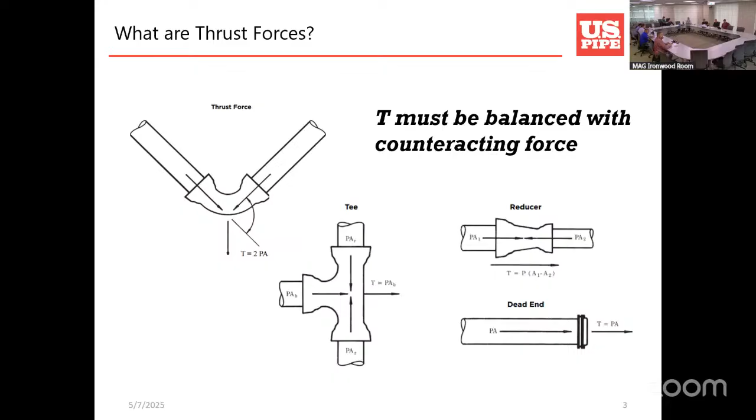The old way of doing this was with thrust blocks. You had bearing, gravity.

So in this example, it's a change in direction, so you had to have something there to prevent that pipe from pulling apart. The thing is, with the concrete thrust blocks, it takes time to pour that concrete and let it cure. It takes up a lot of valuable real estate, depending on the size and also the pressure of the line. Those thrust blocks can get very large. And since it's taking up a lot of valuable real estate, if there's ever construction around it in the future and it gets dislodged, you could have a leak and an issue.

So there is restrained joint pipe that means you don't have to use thrust blocks anymore if you are using those restrained joint pipes.

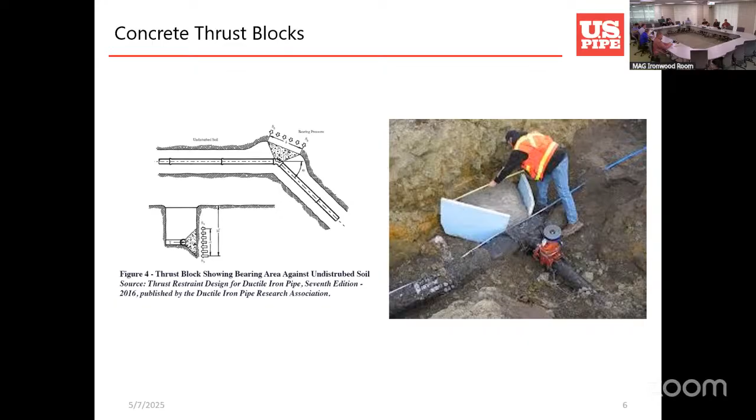So DIPRA, the Ductile Iron Pipe Research Association, has a calculator on their website - the restrained joint calculator. You plug in all your different parameters - size, diameter, laying condition, et cetera - and it's going to spit out an answer and let you know what your required restrained joint length is to counter those thrust forces.

And you'll notice too, it gives it to you in bare and poly-wrapped length, because poly-wrap, when you do poly-wrap the pipe, does require more restraint distance due to the frictional forces acting on that pipeline.

So the first type of restrained joint to mention is the Field Lok 350. This is one of our restrained joint gaskets. This replaces the traditional Tyton joint gasket and a Tyton joint bell. And you'll notice the teeth on those gaskets.

Simply put, you insert spigot into the bell and pull back. Those teeth bite down to the pipe, and it's now restrained. You'll notice it's limited in size - only available in 4 through 24 inches - but it is a very effective tool, and it allows you to just turn that regular push-on joint pipe into a restrained joint pipe.

So US Pipe actually introduced a factory restrained joint ductile iron pipe to the United States in 1979. We've been dealing with this for a few years, and you'll notice we've had a number of different restrained joints over the years, starting with the TR Flex, which was the one introduced in 1979. That went up through 36 inches, with varying deflection.

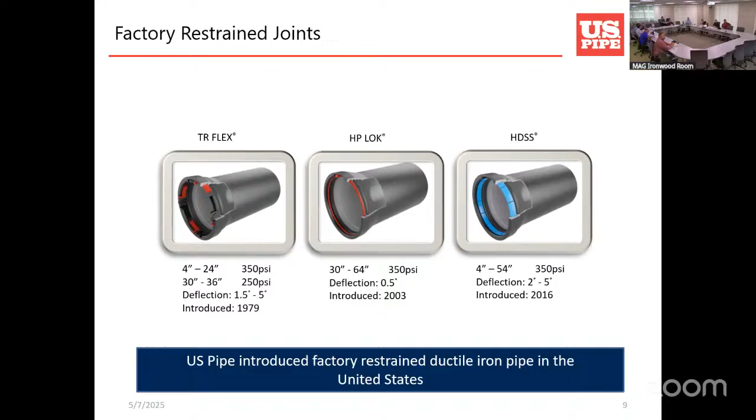So with restrained joint pipe, the way these actually function is you have a weld bead on the spigot end of the pipe, and then you have some sort of restraining mechanism internal to the bell. The more contact area that you can have on that weld bead, the higher the pressure rating can be, because you're distributing the forces around the circumference of the pipe.

And with the TR Flex, you notice the red is the contact area where the actual restraining mechanism is - there's a bunch of open slots there. The thing with the TR Flex is in the larger diameter, 30 and 36 inches in particular, under high pressure situations, since it doesn't have a contact area all the way around the circumference of the pipe, it creates these point loads, which is why we actually had to derate it by 100 PSI in 30 and 36 inches. What I mean by that is a class 350, normally rated at 350 PSI, was only rated at 250 PSI. So you had to use that class 350 pipe to get that 250 PSI rating - sort of a limitation there.

And then with the HP LOK, you almost have a full 360 degrees of contact area on that weld bead, which is why it had a higher pressure rating.

But with it being one solid ring, that's why it only had a half a degree deflection, which is why we introduced the HDSS, which almost has a full 360 degrees of contact area on that weld bead, but it uses individual locking segments, which is where you get a higher deflection capability from.

So again, the TR Flex had a left hand and a right hand locking segment. They were red and black. 4 to 24 inches was rated at 350, 30 and 36. We derated like we just talked about.

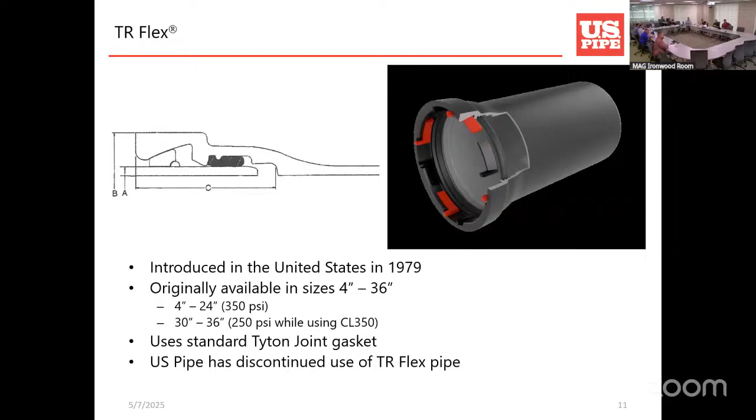Simply put, spigot into bell, you can see the weld bead on the spigot end, then those locking segments get inserted. So as those thrust forces are applied and trying to rip that pipe apart, that locking segments are making contact with that weld bead, and that's what's preventing the pipe from pulling apart.

And what's good about restrained joint pipe is it can go together very quickly. Small diameter, 20 seconds or less, larger diameter is a couple of minutes. So it's a very quick way as well.

And then the HP LOK, we introduced this back in 2003, 30 to 64 inches. Now we only have it available in 60 and 64 inches.

The pipe comes with the ring already in the bell, so you would insert the spigot into the bell, tighten down that nut and bolt system, which would tighten down the ring in front of that weld bead. And then when your thrust forces were applied, the ring would make contact with the weld bead again, preventing the pipe from pulling apart.

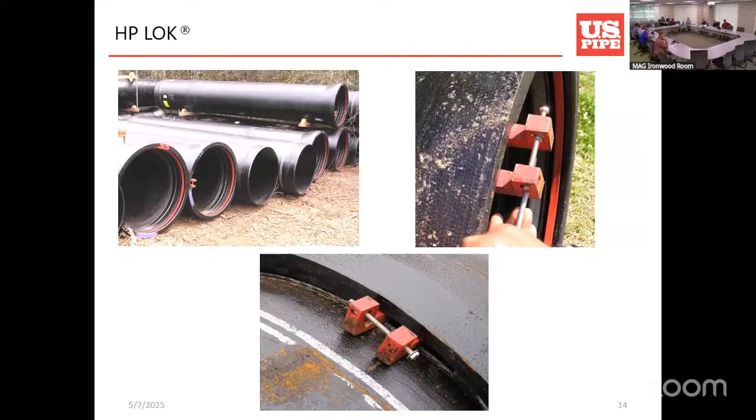And then we introduced HDSS back in 2016, 4 to 54 inches. Again, you can see almost a full 360 degrees of contact area on that weld bead with those individual locking segments, which are what you see in blue on the screen.

And what's good about HDSS as well, though, is its restraint joint working pressure rating is true to its size. So a class 350 is rated at 350 PSI, class 250 is rated at 250 PSI. So this is the industry leading restraint joint with deflection and pressure rating as well.

And you can see underneath the bell there in that picture, you can actually see those locking segments as well. So it's kind of a check for the contractor. They can see all the locking segments underneath the bell.

And what's good about these two is these locking segments are inserted through that 12 o'clock position and then slid to the left and slid to the right. So it's all gravity fed. So if they're not going together for whatever reason or not dropping in place, it's kind of a check on learning, hey, something's not right here, which allows that contractor to go back and fix the problem. Maybe they're over deflected, not homed all the way, whatever it may be.

And then by only inserting the locking segments through the 12 o'clock position too, there's safety in mind there. So the contractor's not reaching down underneath the pipe to like the 7 and 5 o'clock position. They're only inserting those locking segments through the 12 o'clock position.

And what's good about it too is you can see all the deflection capabilities, and you can see why we have that. 30 inches is a really good example. 2.5 degrees deflection while rated at 350 PSI, as compared to that HP LOK, which was only a half a degree of deflection while rated at 350, as compared to the TR Flex, which is 1 3/4 degrees deflection, but only rated at 250 PSI.

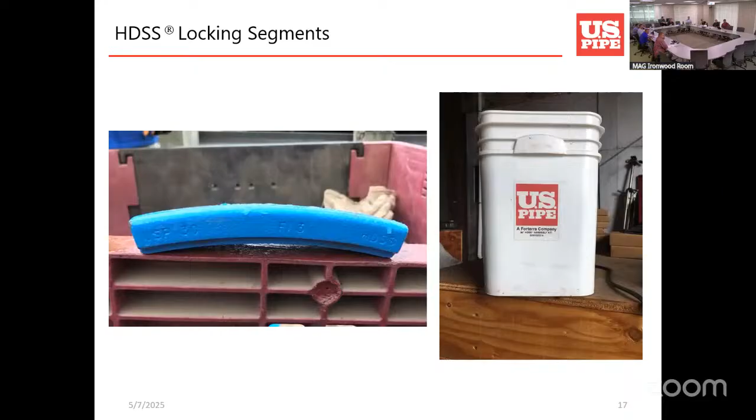And then you can kind of see it in the upper left-hand corner photo, but there's little notches on the back side of the locking segments. And that also allows the contractor to disassemble this for whatever reason. Maybe they install an extra joint, didn't need it to be there. They can disassemble this as well.

Next slide. And then we had to go through a whole testing process. We can't just claim that we meet AWWA. We have to go through a third-party test, regular testing, and then third-party testing. So this was actually a 48-inch HDSS Class 350 test that we did back in 2020. And it actually tested to 969 PSI to failure, which meets and exceeds the standard. And that equates to about 1.8 million pounds of thrust force.

And there is a video there if you want to play that.

To put that in context, about 1.8 million pounds of thrust force - we're talking that's like the amount of thrust force that takes rockets into space. So that's a substantial amount of force right there.

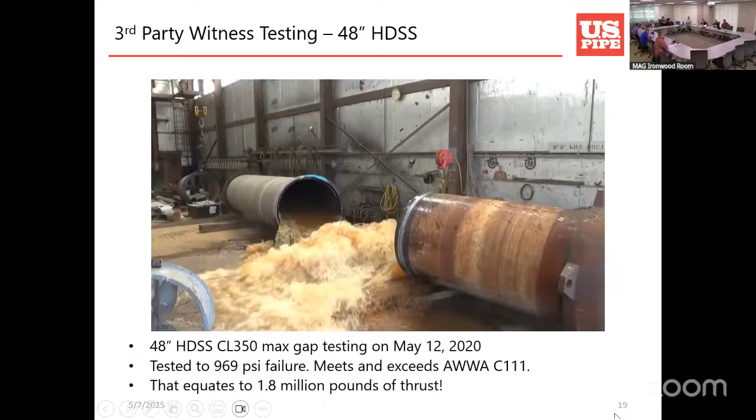And then lastly, just corrosion control. There's numerous methods to protect ductile iron pipe in regards to corrosion. The first and one of the most popular is polyethylene encasement, also known as polywrap. It's economical, it's effective. Essentially what it's doing is minimizing the flux of water making contact with the pipe surface. And what water does, water brings oxygen. So oxygen is a component that could cause corrosion. So if you eliminate that, you help eliminate the corrosion potential.

There is an improved version through DIPRA. All the member companies utilize VBio - so us, McWane and American all utilize this, but it's an improved, enhanced polyethylene encasement. So it still protects against normal galvanic corrosion, but it also has a biocide in it that helps protect against any sort of microbiologically influenced corrosion. But then it also has a corrosion inhibitor on the inside surface. So when you polywrap pipe, you're trapping in oxygen. An initial corrosion rate could occur, but the corrosion inhibitor prevents that from occurring.

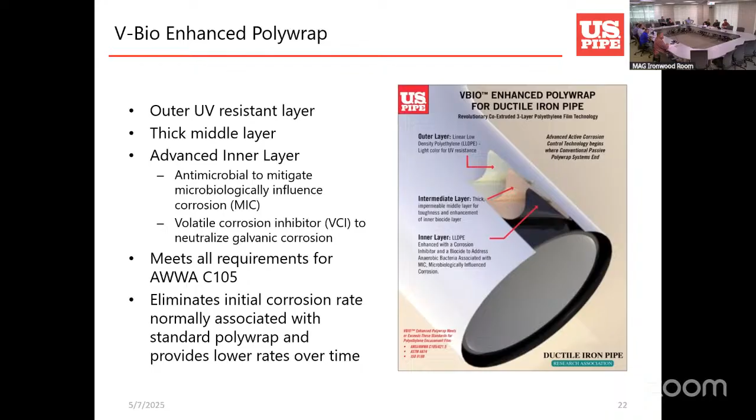And it's white like that. You'll wonder, why is it white like that? White polywrap on black pipe helps identify cuts or tears. So during the construction process, if anything gets torn, you could actually see it and then replace it. Whereas if it's black polywrap on black pipe, it's a little harder to identify that.

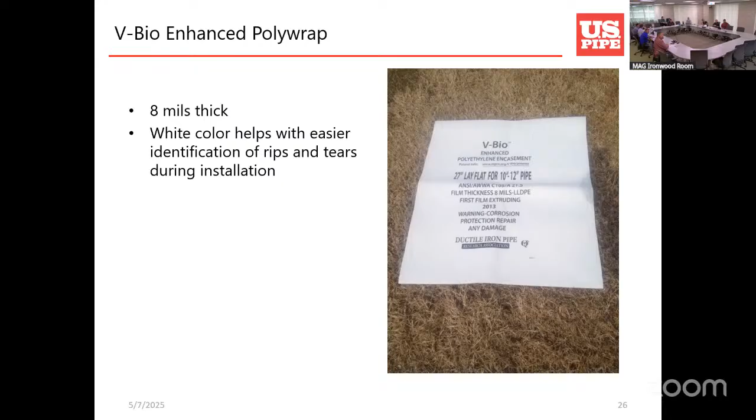And then metallic zinc. So what zinc is, it's essentially acting as a massive anode, a sacrificial cathodic protection system. It's applied through a thermal sprayer. It's 99.9% pure zinc, and it's applied per ISO 8179 at 200 grams per square meter. So it's applied in weight, not necessarily in mil thickness, but it's roughly about 1 to 2 mils thick.

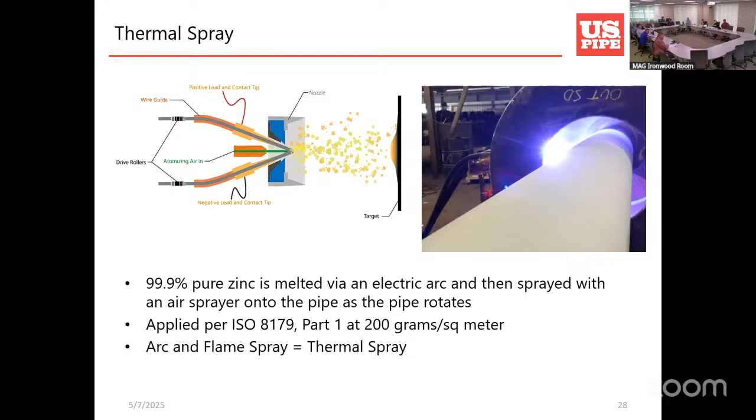And you might wonder, when do I need zinc? When should I use polywrap? So DIPRA, along with Corrpro years ago, put together this design decision model, DDM. There's a likelihood and consequence - based on the soil studies, based on the pH, the chlorides, the redox, all that in the soil, and then also the consequence, what's the size, is there an alternate pipeline. It's a point-based system to actually help you determine when you actually need these corrosion protection methods for your pipeline. So that way you're not just arbitrarily saying we need to always use zinc, but it's giving you actual scientific reasoning when you do need it. And that's just the chart.

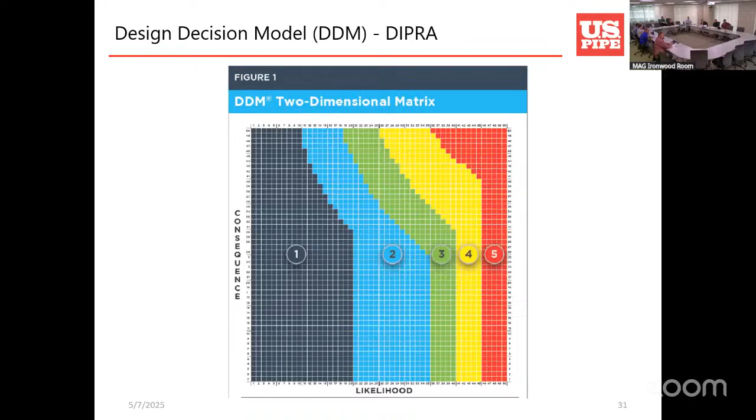You'll plot your points, and it will tell you 1 through 5, 5 being the worst, 1 being a really good environment, but it will tell you when you actually need to use what. So 1 would be as-manufactured with shop coat, and 5 is a really bad environment where we're recommending the zinc and the V-Bio used together.

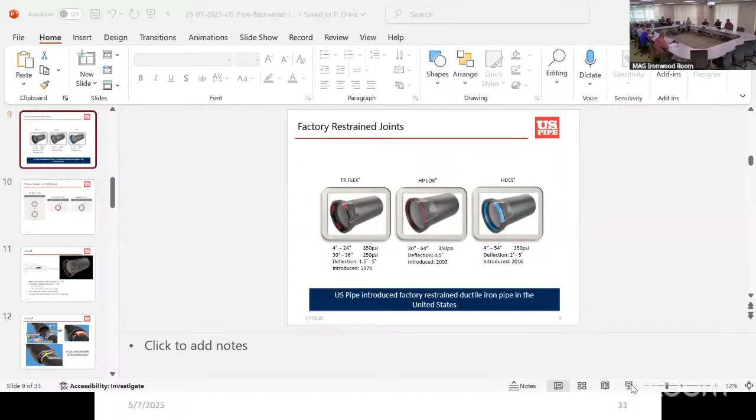Yeah, HDSS, that's it. The other thing is DIPRA—Jeffrey Butters is also available to come out if you guys need something on corrosion protection and don't want to bring a specific manufacturer on board. DIPRA, the Ductile Iron Pipe Research Association, kind of oversees that. You're more than welcome to invite him too.

Is there a quick link to that restrained joint calculator, Gene? There is, on DIPRA's website. Go ahead, Jeffrey. Yeah, if you go to dipra.org and look up technical references, there'll be a link for the calculators—we have a list of calculators there you can use. Okay, yeah, I think I've seen it before. Gordon, could you put up that contact sheet, that last slide, one more time please?

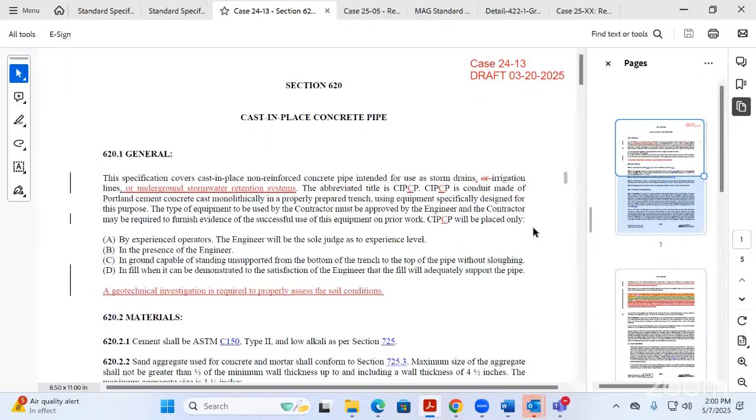So that still needs to be done, but I feel like from what I've heard, we were open to the potential of maybe pushing this to an action item to vote on approving the premise of the case that we started with. This one does clean up the nomenclature for cast in place concrete pipe and does take out some of the archaic language for what to do with expansive soil conditions that is not with that strikeout right there.

So as we know, we then got into getting input from the Bluecor's geotech team, and we added this new paragraph. So I still feel like the broader case, if we were to produce another case that would look at the ADOT and ACI specs, there's more work to be done there based on Brian's input. But I'm open to get this off the list for now, to propose moving this to an action item and then continue the effort to look at a broader case to do an overhaul on this.

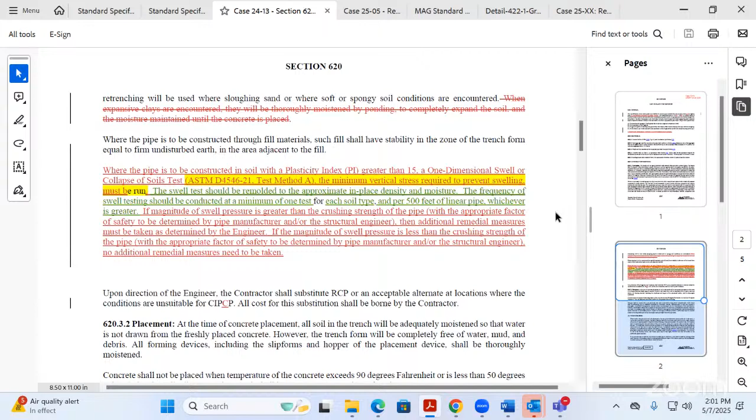So Warren, refresh my memory, but I recall this being up for action at one point, potential action, and then we had some feedback and it looked like it was going to grow into something larger. We pulled it off the agenda for action. But what I'm hearing is that we're not going to be growing it into that bigger item. Is that what I'm hearing?

Yeah, there is still room for that. And as we know, if we were to have some time to regroup with Bluecor and Brian, we could still kick this for another month just to see if we could pull this together to do the broader case. But we're still left with those two options. If we wanted to put it on action for next month with option one as is, and if we are able to gather steam to draft the overall case, then we could go in that direction too. So that's pretty much where we're at.

Okay, well getting some time to roll our sleeves up and get everyone together is the key item there. I think at this point, we need to encourage all the committee members to go through this and see where they stand on it. We'll put it up for possible action for the next meeting. Is that what I'm hearing, Warren? Your preference? Yes. Okay.

In the meantime, I will make sure that we get out there on the case page, the ADOT spec and the ACI spec, so we can all see that together.

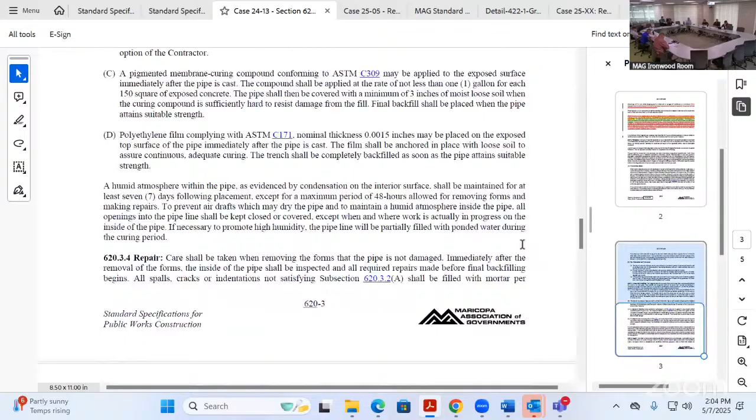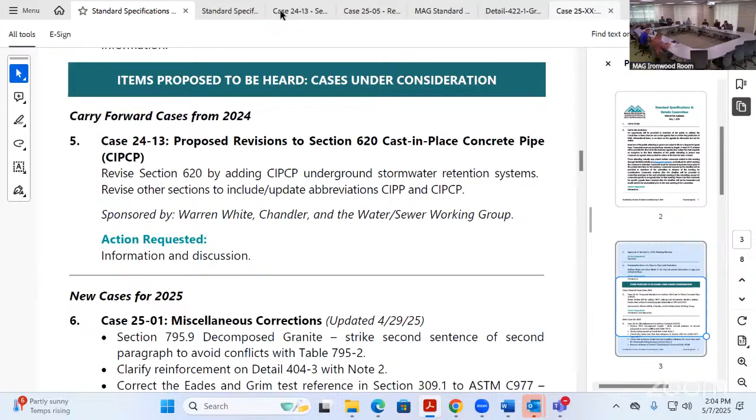We'll move into agenda item number 6, new cases for 2025. This is miscellaneous corrections. We have one that was added for section 752, which was deleted out of MAG. I'm not sure when it was deleted, but it doesn't exist, so we need to get that scratched out. It'll be 610.10 B as in boy for joints, and it'll just reference section 750.

All right, any questions from the committee members on miscellaneous corrections or any of them on there?

Just one comment, Mr. Chairman. I haven't read it in a while. 610 is just the general water line spec, right? Is the 752 section the old ACP pipe? That I don't know. 752, does anybody? That is correct.

So in this joint section, should we also make reference to the PVC water line spec then? Because that might have different joints, not just that. 750 is ductile pipe, so if we replace 752, maybe we need to insert the PVC spec as well.

Yeah, let me look at that. That's a good point. Thank you.

I don't know if we have a PVC pipe material pipe section in 700 though. Jim Badowich, Avondale - that's one thing I discussed, I think, at the last meeting. We need to add that. We've got all these other materials in there and somehow PVC got left out. Wait, Jim, am I hearing that there is a section and we need to add it to the 610 reference, or we need to create a section for PVC? I think we need to create a 700 section for PVC.

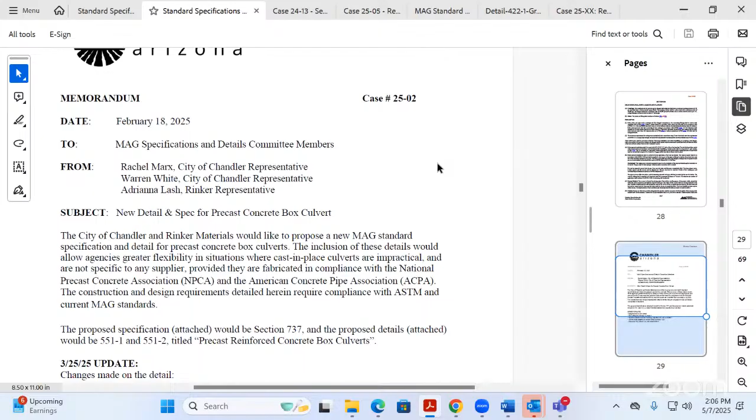Thanks again, Mr. Chair. I don't believe Adrianna was able to make it today, but we received comments from City of Phoenix. Thanks, Jose. Through that process, updates were done to the spec. There's the comments from City of Phoenix.

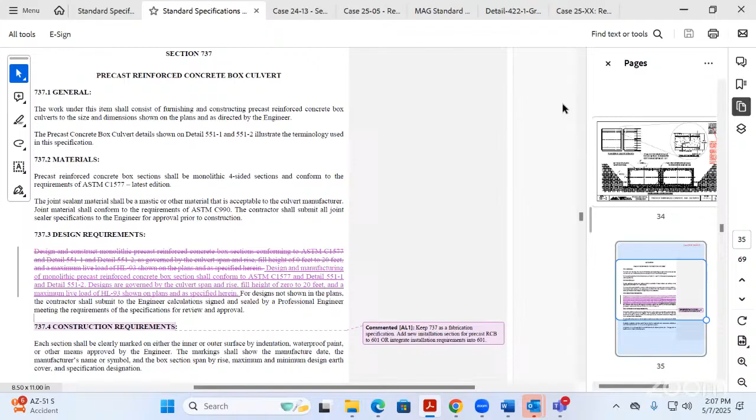One remaining discussion item, and I feel like we have good direction, is obviously this is meant to be a material spec, and whether to keep this as a fabrication spec or a material spec, or integrate installation into this. The thought is to probably keep it as material, and then move some of the installation aspects to 601, and that's still on the list to do. We did want to work through the working group a little more this month to talk through some of those things.

So Warren, I know Ryan Nichols had a lot of questions or comments at the last meeting. Can't recall all of them, but did we address some of those or at least take them into consideration? I will have to go back and look through those to see if we've touched on all of Ryan's comments, but if not, we'll bullet those out and add that to the discussion.

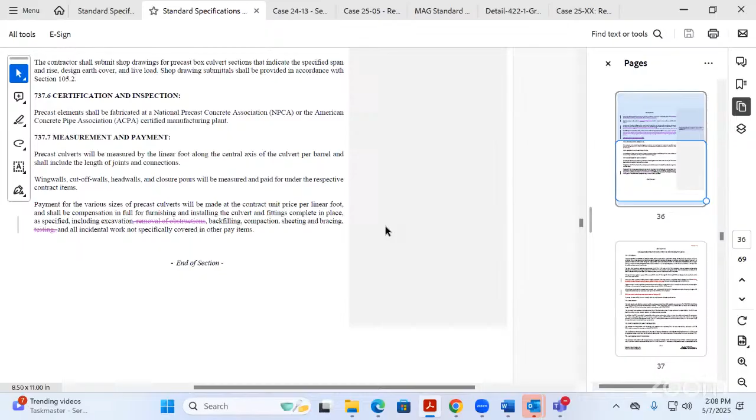Still need to get a meeting set up with Adrianna to go through this when I have some more time as well. Yeah, I looked through the meeting minutes. I did see him in there, unless Ryan wants to touch on them again.

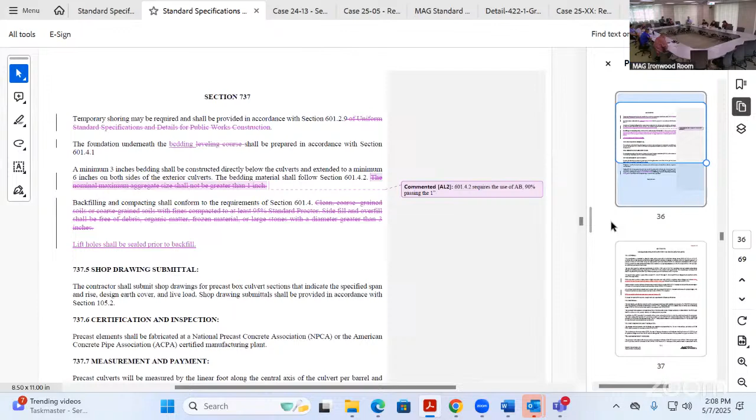No, okay. There was a removal by others. We're supposed to remove that language out of the detail. Is that the same detail, right? Yeah, yeah. Changes have been made to the detail at this point.

All right, anything else on this case, Warren? Not at this point. Yeah, Ryan, we'll make sure we revisit your comments and get this updated for the next meeting. All right, open it up to the committee for discussion. Any other questions or comments from committee members?

All right, agenda item number 8 is case 25-03. This is section 751, cross-link polyethylene pipe for water service lines, also known as PEX A. This one also has brought Warren White from Chandler. Warren's been a busy man.

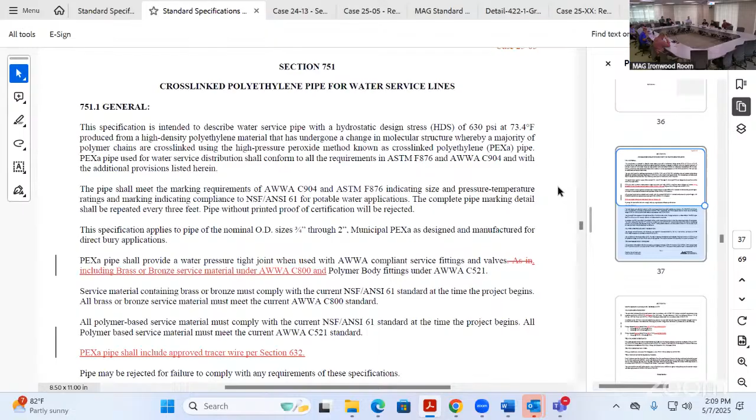I know we were talking about identifying at the last meeting, identifying the municipal PEX A with certain markers. And then obviously there's a lot of discussion about pipe colors and including markings. But Warren, you want to go ahead and give us an update?

Thanks again, Gene. At this point, we incorporated some of the feedback that we received in the committee meeting and then also in the working group, plus identifying through Jeremy's identified another change there in that first red section where in addition to the brass and bronze service for the AWWA requirements.

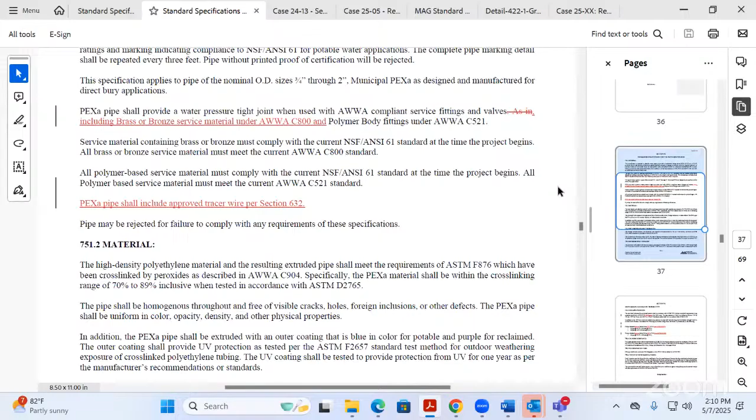And then the one aspect that came out in the working group, I believe it was Jim's comment, although not exactly fitting here on the material spec, but the thought was from the working group, it would be helpful to ensure that the tracer wire is at least included here. It is part of the new section 632 for all service lines. But we've drafted it in here just to, at this point, for feedback.

Very good. Yeah, that's crucial component being non-metallic. We need to be able to trace that.

And then onward from there, there was some comments in the last group. So we just cleaned this up a little bit to be more clear that the bulleted standard design factors are coming from that ASTM D2387. And then just kind of changing the language there to better match the ASTM. Just some general cleanup at this point. Looking for more feedback.

Thank you, Warren. I know I mentioned it a dozen times, but Glendale gave it a shot. We use it on the back side of the backflow preventer, and it worked out really well. We put it in a sleeve and gave it a shot.

All right, I'm going to open it up to the committee members for discussion. Any questions, comments on this case?

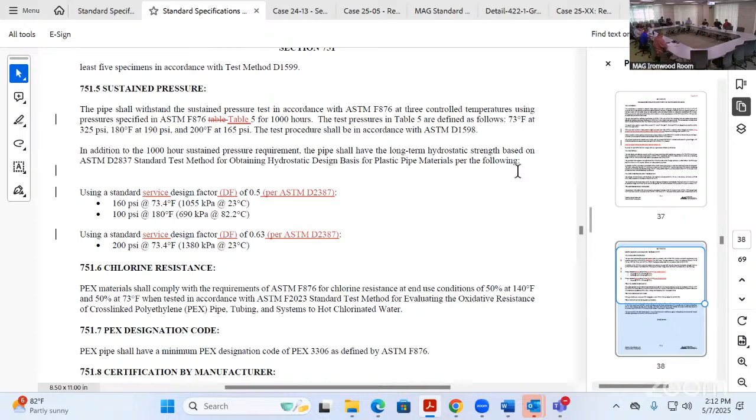Warren, any idea? What are you thinking for putting it up for action? Put it out to Jim, and Jim, do you think what, another meeting, working group, finalize and then call it maybe for July, maybe? Mr. Badowich? I think that's fair, Warren. Okay.

There's no rush. It's not a large section. It's relatively small. Our committee members can get through it in a matter of minutes. So I encourage all committee members to review it and give input back to Warren or the working group committee. And we'll discuss it at the next working group meeting and then put it up for action. Maybe we'll discuss the details of it at the next standard specification and detail committee meeting.

All right, any other questions regarding the PEX?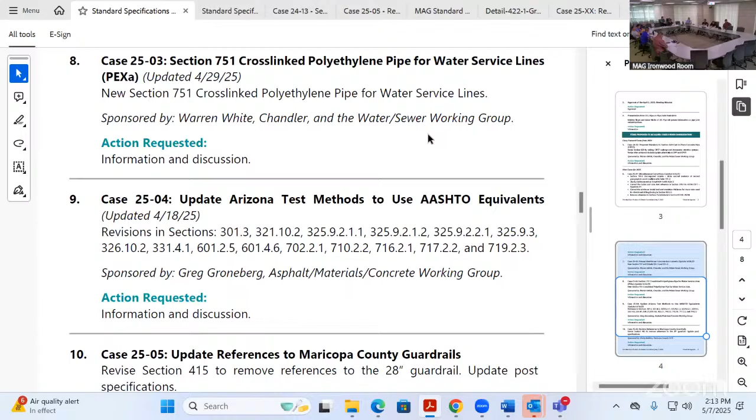Moving into agenda item number 9, this is case 2025-04, updating Arizona test methods using the AASHTO equivalent version. Greg is obviously not here in the flesh. We feel him, we feel his presence. Rob is going to speak on Greg's behalf. If you want to give us an update, please.

So we've gone through the working group and kind of identified every area within MAG that they reference the Arizona standard test methods. ADOT has decided to eliminate or change up their ATTI program to move towards all AASHTO procedures, which is great for MAG because you guys are pretty much all AASHTO procedures, but there is some sampling and different test methods that are referenced that we're gearing towards the ATTI certification. That way, when technicians get certified, they're actually being certified for what they're doing within MAG instead of MAG having old ADOT methods. So it's just updating this.

Their field certification changed in March to AASHTO. Their laboratory is changing in July, and their asphalt is being updated in September. So we'd like to get this approved this year. That way, starting in 2026, it's in line with ADOT and the ATTI methods.

I think ARPA did a representative of ARPA, Arizona Rock Products Association. You guys did a great job getting in front of this.

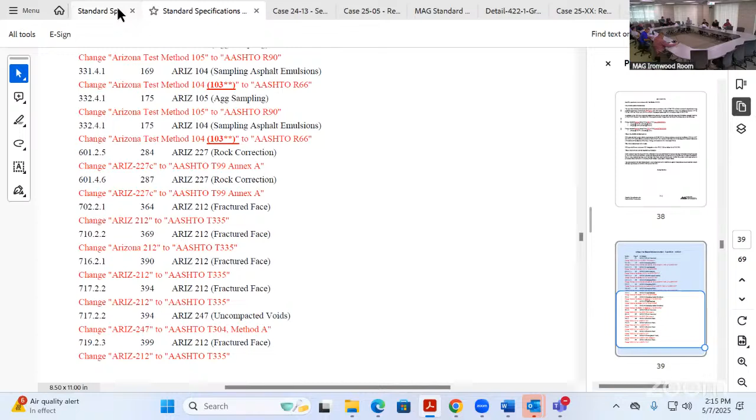All right. We'll move into case 25-05, agenda item number 10. This is updating references, Maricopa County guardrails.

Marty, I don't believe Marty's on, is he? I'm here, this is Marty. Nice, you want to give an update on this, please? I apologize, I was late, I was just keying away and totally forgot, but I came on about 2 o'clock, so I'm here.

You have an update you want to provide, Marty? I do not have any updates. I did take a look at ADOT, did go over to take a look, that was suggested. We don't have any comments regarding what ADOT has, and we just wanted to make minor changes with respect to the 2800 series, just to remove those details because we are removing them from our standards in 2026. And we'll be using them only for maintenance purposes. So if there's any questions on?

When would you like to see this case go, Marty? This year, anytime you feel comfortable with moving it forward. So we'd like to see it implemented for 2026. But anytime, if there's no questions or comments, move forward anytime you would like.

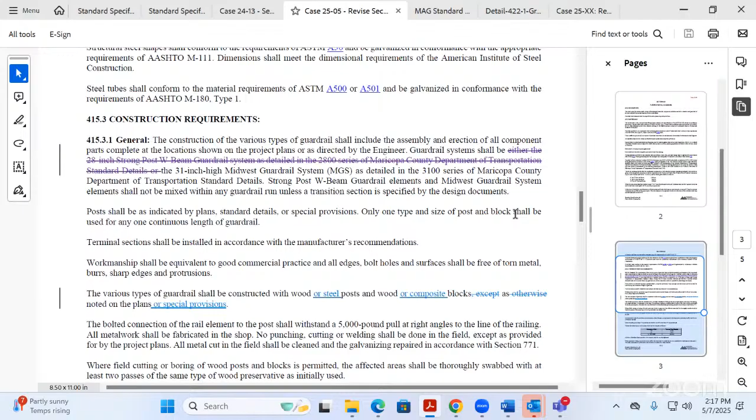All right, well I'd suggest everybody get it to their transportation division and see if there's any comments from their end that maybe we didn't address. Definitely contact me, or at the meeting here, or you can contact me if you have any questions. I don't know if any jurisdictions are still using those details, so if there's any jurisdiction still using those details that are references from ours, definitely reach out to me so I can have a discussion. Yeah, thank you, Marty. All right, any other committee members have questions or comments on this case?

Marty, this is Brian Gallimore. Is any of the detail changing or just the specification itself? No, the details are being removed. So from the standard, the MAG standard details that we have for the 2800 series, all those details are being physically removed from our supplement, and we're going to go with the 3100 series for MASH. So we just wanted this to reference that, and we will make modifications to our specification for guardrail in our supplement as well.

Okay, thank you, Marty. Okay. Thank you, Brian. Marty, thank you for the case and the update. Any other comments from committee members on the case?

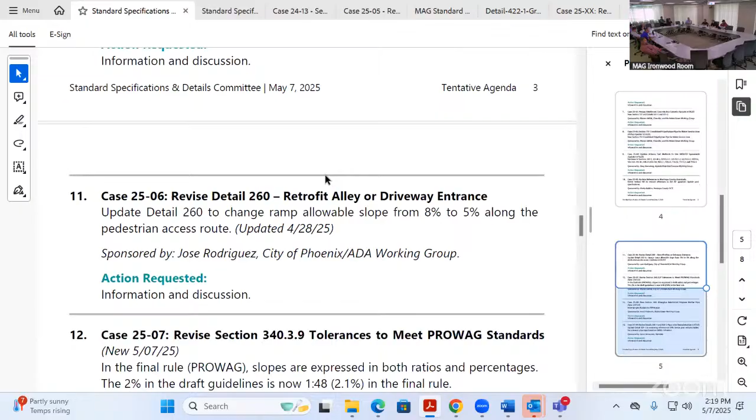All right, hearing none, we'll move into agenda item number 11, case 25-06, revised detail 260. This is a retrofit alley or driveway entrance. Jose Rodriguez from City of Phoenix, you want to provide an update?

Yes, thank you, Mr. Chairman. So we discussed this a little bit more at the ADA working group. There's a couple of comments that came out from that discussion. There's a suggestion from the City of Tempe - I know Gordon's trying to work on putting it up there - changing a little bit of the language on the call-out for the sidewalk width. They just want to make sure that they emphasize that the sidewalk width needs to be agreed upon by the agency, not necessarily as shown on the plans, because they have some non-standard cross sections where they have really wide sidewalks. So that's that box on the top of the red notes.

Couldn't you just leave it as minimum 8 or minimum 5? No, they want to make sure that they specify that the overall width needs to be approved by the agency, because they get some plans that fall through the cracks and call out a sidewalk width that doesn't meet their standards. It's a review, we'll deal with it.

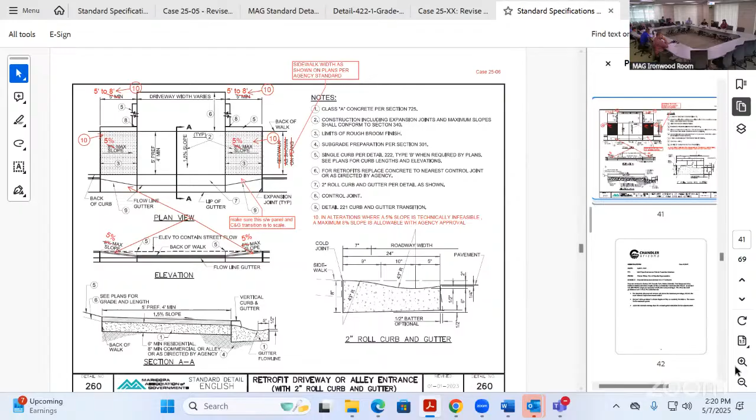Plan review, right? And outside of that, there was a general comment to make sure that when we rework this detail, the dimensions or the drawing are somewhat to scale. So we'll take a look at that when we revise it. I haven't heard any other comments on it. I'll bring in a clean copy at the next meeting, and then probably looking forward to a potential vote in July.

How's the working group doing? You getting good feedback from the members? Yep, there's a lot of work to be done, so we're getting a lot of attendance. That's for sure. Well, attendance is one thing, but is it like a typical project where two guys do all the work and everybody gets the same grade? I think we're cracking the shell of some of the participants.

Can you remind me, the change from 8% slope to 5% slope was because these are not interpreted to be curb ramps, and so it doesn't meet the standard?

Is that why the change? Correct, yes. Because we checked with the access board, and technically because the pedestrian is still walking through what is considered the sidewalk, they need to maintain that maximum slope, as opposed to leaving the curb. So it's not a curb ramp, it's not a curb. Okay, thank you.

Therefore, it would not require truncated domes because you're not leaving the sidewalk? Yes, but just to clarify, there are other conditions where you would need truncated domes under PROWAG, and that really comes down to whether or not that driveway has a yield sign, a stop sign, or a traffic signal.

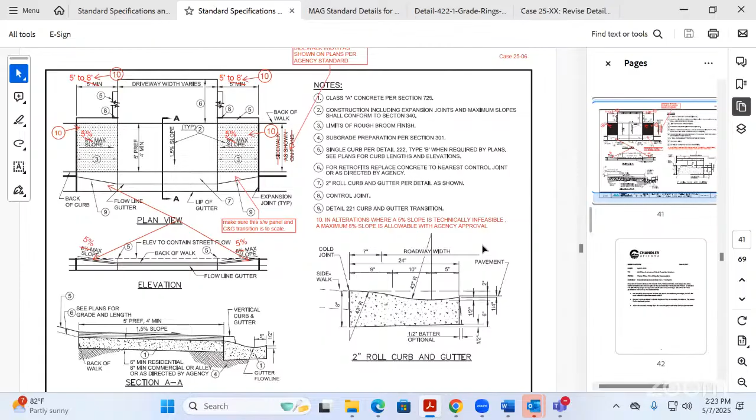And that goes on that note 10 too, Jose, right? Yes. All right, thank you, Jose, for that update. Do you have any other items you need to update? I'll open it up to the committee members for additional discussion. Any questions or comments on the case?

All right, I encourage everybody to look at the markups. Jose, are you going to start putting this into a clean version then? That's what I heard. Yeah, I think Warren and I had discussed in the working group that we were going to look for a volunteer from our consultant partners to help out with some of the drafting effort. If not, I'll get somebody in the city, but I think I did find somebody, I just need to reach out to them.

Right, thank you. All right, agenda item number 12, which would be case 25-07. This is revised section 340.3.9, tolerances to meet the PROWAG standard, another ADA item, with Warren from Chandler sponsoring this. Warren, since this is a new case, you want to provide some context to it?

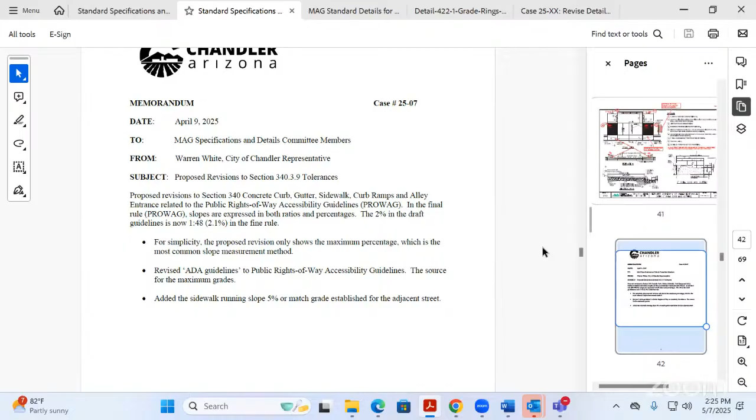Sure, thanks, Dean. Yeah, this would be our second case coming out of the working group, more or less the low-hanging fruit item, just to modify the tolerance section in section 340 to better match the slight changes that came in PROWAG, mainly for the slope allowance, which is now from 2% to 2.1, and then revisiting that paragraph slightly just to clarify.

And then there are some times where that may not fit everything, so that first sentence we've added, except as expressly allowed for certain conditions, this statement the grades shall not exceed the maximum grades indicated, and then removing the older term ADA guidelines for specifically where this is coming from, which is the PROWAG.

So this is where we're at in terms of the working group's discussion and this paragraph, open to any feedback on that. Yeah, I'll open it up for discussion.

Ryan? Yeah, Warren, I'm noting that the tolerances, the percentages are sometimes listed as a whole number, no decimal, and sometimes with a single decimal. And I guess the question becomes, what's the tolerance to the tolerance, right? Right, so and I'm going off memory here, but a 1 in 48 slope is 2.08 something percent, and it looks like it's been rounded up to 2.1.

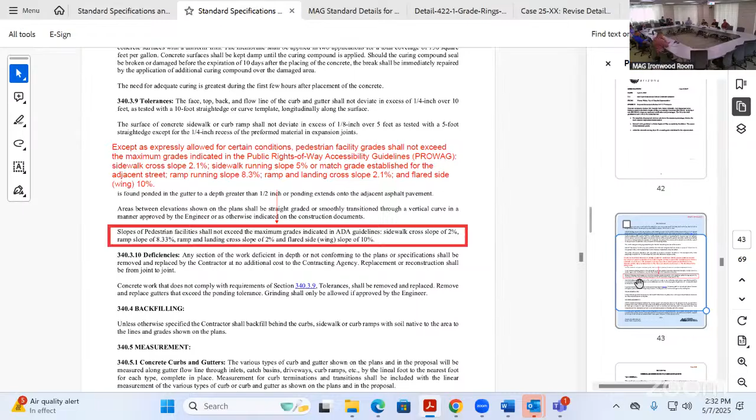This is case 25-08, a new section 746 for fiberglass reinforced polymer mortar pipe. This one is brought by Arvid. Arvid's not here today, so I can give a quick 30,000 foot summary. If anybody else has been intimately involved, feel free to jump in. Basically, it's for gravity feed sewer, sewer force main, storm drain irrigation, water transmission, and other conveyance systems with an operating pressure up to 350. It's good for 12-inch through 126-inch pipe, direct bury, slip lining, casing carrier, tunnel carrier, direct jacking, micro tunneling, and above ground.

So I encourage all the committee members to look at this new section. It was just put out.

Any other committee members been involved in this with Arvid?

Good afternoon, everybody. This is Rene Garcia. I've been intimately involved with it, I wrote it. I'm with Hobas Pipe, Senior Director of Engineering, been there for 25 years. We were asked to write a material spec for fiberglass pipe that was generic for this type of pipe and its use. So this is what I came up with. Arvid's not here today, so I'm sitting in if there's any questions or comments related to this particular material spec. I can help. This one's in the sewer water working group, I assume.

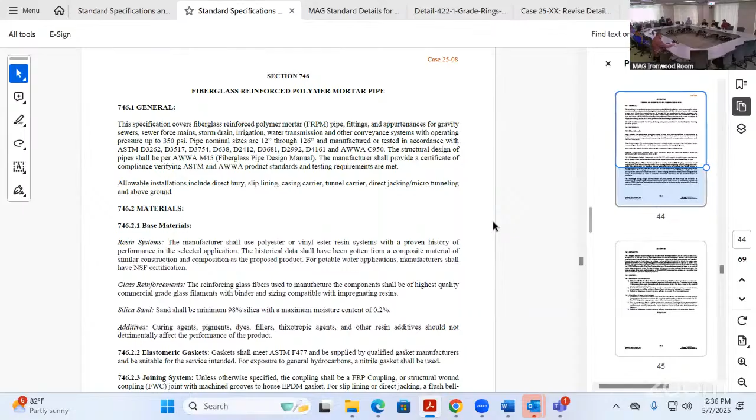Jim, maybe a good resolution is to have either Hobas or one of the other manufacturers, since Renee wrote this spec, put together a presentation for the working group. Yeah, I'd like that, Renee. We'll talk about it later in the meeting today, but I'd like to get reacquainted, I guess, with some of the uses of it. Yeah, absolutely, I'd be happy to do that. It's been around for a while, but like I said, I've never heard of it being used for pressure water lines.

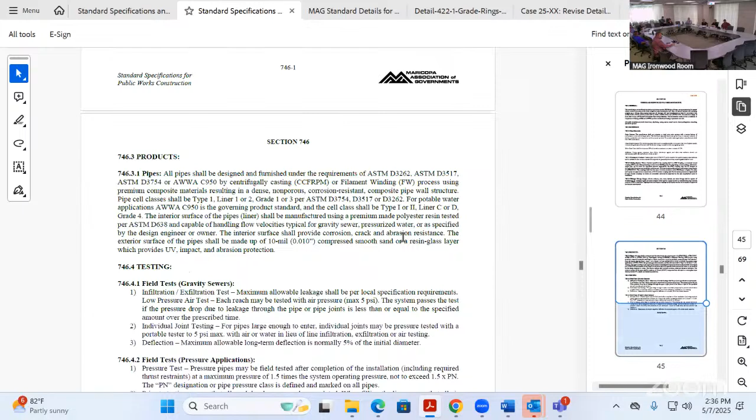Thank you, Jim. Any other committee members? Renee, did you give all the information you wanted to give on this case? Yes. I know the most recent update was regarding the testing section that I added. I think it came up in one of the previous meetings, so I added that to the end of this spec.

746.4.2 field tests, pressure application. Oh, the whole testing section. I see, 0.4, field test gravity sewer. Okay, thank you. Any committee members have any questions or comments on this case? It's a brand new case, so I'd encourage everybody to review it.

Mr. Chairman? Yes, sir. This is primarily meant to be a material specification, and it does reference casing carrier and tunnel carrier. Therefore, it does have applications in the electric power industry. It's been used in Phoenix, in the Phoenix metropolitan area, as carrier pipe for high voltage underground electric. So I'm going to do some checking on that.

The concern I have is that we've added a testing section and a field testing section for a material specification, without an installation reference to that. So to me, those would be applicable if you are installing it for the purpose of carrying a fluid. If it's being used as a carrier pipe for dry utilities, that would not be applicable. So we've got to be a little careful when we put a partial installation piece in a material specification that could have wider applications.

Yeah, Peter, they show that on the front side. I think that's a good point. So maybe move that part to 711 or 611.

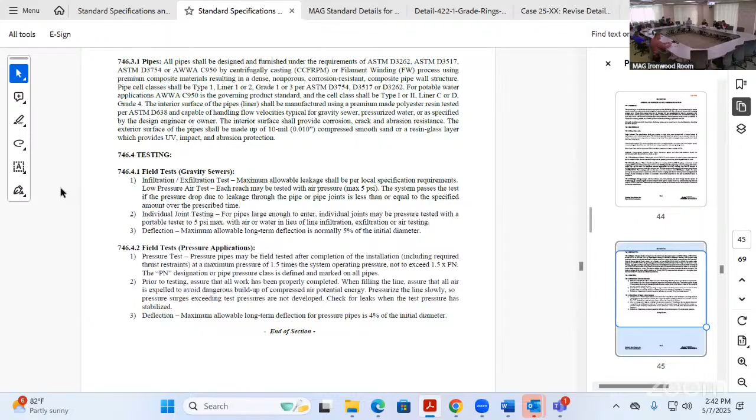We're going to need to look at that. Jim, I would agree with you. I don't think the committee's into making those special arrangements for different materials. We're going to have one testing specification to capture all those materials. It should—that's not fair to the other materials. So that's what I would say.

So Renee, we've got our working group. We need you to do your little homework on that, and we can discuss it at the working group. Absolutely, yeah, I'll take a look at it and participate in that.

Looking at 611, we could probably just reference that as the applicable testing section. Yeah, if your material meets the testing requirements, that's great, that'll work fine. But we kind of want to stay away from having special exceptions for your pipe material regarding testing. So you either meet it or you don't.

If you don't, then—because I've heard of it, Arvid's mainly been pushing this for a casing pipe for railways and stuff like that. And I know it's been used in some large diameter sewers, but that's about it as far as I know in Arizona anyway. So.

Yeah, no, absolutely. And there's a pressurized sewer job that I know of for sure in Phoenix that was installed in 2000 and it's still in service. So it's a pressure application with fittings and whatnot. But check the AWWA, see if it's even allowed in their spec. We can get in more detail later in the working group. Sounds good.

Thank you, Jim. Thank you for jumping in and helping me out with that, I appreciate it. Thank you. All right, other comments or questions from committee members on this case?

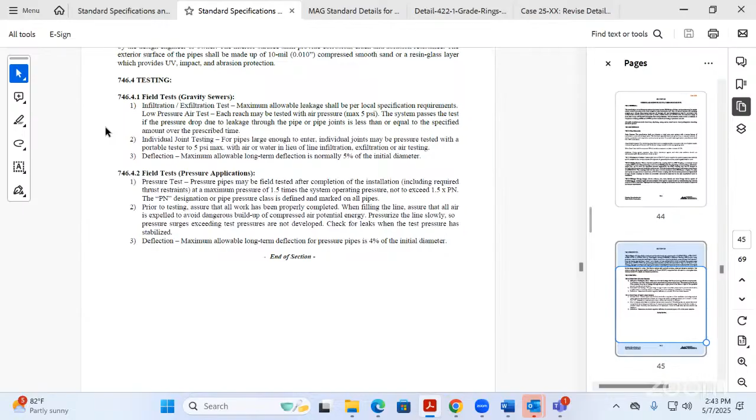All right, we'll go to agenda item number 14. This is a new case, 25-09. We talked about revising details 303-1 and 303-2 for pipe joint restraints.

This one I've been working on with two separate efforts. I've been working with US Pipe, they've really been spearheading, helping me verify a lot of these calculations and drafting these modifications. And then with a separate effort, I've been working with DIPRA, just pushing it through to them to put another set of eyes on it. So with this case in particular, the LRN was the very confusing portion.

We removed the reference to LRN altogether. If you go to the second page, you'll notice the T's and the dead ends are going to be matching distances. That's because with removing the LRN from the equation, now they're treated as a dead end. So this chart, we also deleted some of the odd sizes out of here. We made some notes in the notes section for that, saying you'd go up to the next largest size.

Now, this whole detail, these lengths can be shortened by engineered calculations. So I don't want to say this is specifically for field use, although it is used for field. It could be used for design, but I would hope a designer would double check measurements and save the municipality some money by shortening these lengths. But you'll see that we added a whole other list of assumptions in here under notes.

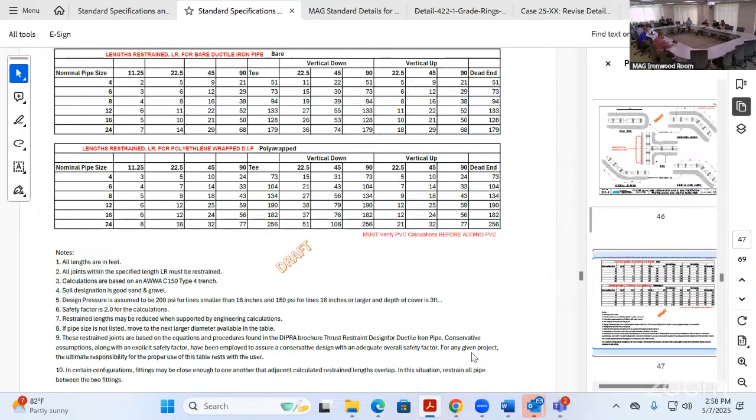Speaking of the numbers, I wanted the members to know that although the packet just includes the updated details that Jane did, on the specifications cases page and also on this meeting page, you can download the full case that includes copies of all the calculations he did for each of those. But it would have doubled the size of the packet, so I'll let you look at those on your own. Yeah, thank you for bringing that up, Gordon. US Pipe took the liberty to put all these through and really evaluate with the assumptions and put the work into it, so all the backup is included there. It's just not in your packet; if you downloaded the packet, you'd have to download the individual case. Thank you, Gordon.

Just one more comment. I think note number 2 is gonna have to be revised to make sure that additional joint beyond the length of restrainment is also restrained. But I don't know what the best practice is if within the length of restrainment there's an additional bend. I mean, in theory, if you're introducing a 90 and there's another 90, you could reduce that amount of restrainment, but should it say, instead of saying all joints, all joints, fittings and bends within the length of restrainment plus one should be restrained. That's probably more safety than anything, but it's already got an engineering factor of what, 2 figured into it?

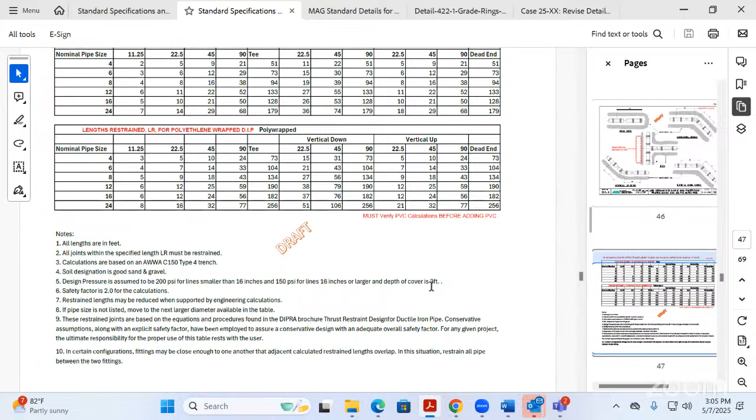So the DIPRA procedures or brochure referenced there would allow somebody to use a 1.5 safety factor, for instance. If you scroll down to the sample calculation, what's shown there is the DIPRA calculator. At the working group, we talked about adding a QR code to this table that would bring you up to that calculator.

That was decided not to be included. But we can pass along the link to this calculator. I have it as a note here to give it to Gordon, and maybe you can add it to the attachment, but we'll circulate the link to this calculator. Yeah, I think it would be good. For the backup calculations, we'll put that QR code on that first sheet then.

It's not part of the detail, won't be part of the detail, but it'll be something to reference for the backup calculations.

You got a comment, Jeffrey? One thing about the DIPRA calculator is we assume a smooth wall pipe, which everybody knows ductile iron is not a smooth wall pipe. So if your engineer really wanted to save you a foot or two, they could use that as part of the calculation.

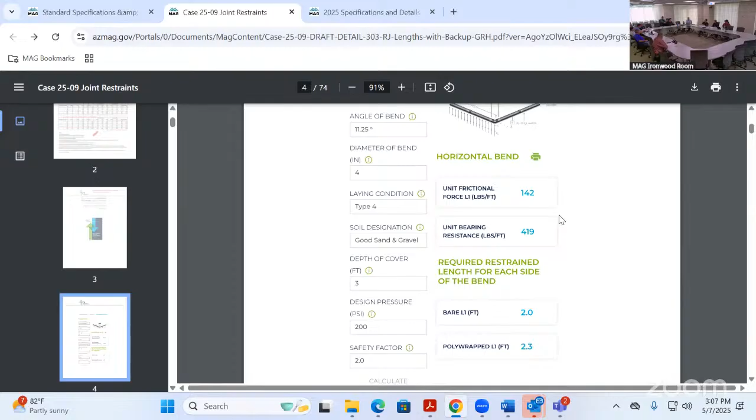And because of the peen pattern, it actually is more slip resistant than what we give it credit for. It's just part of the conservative nature of our calculators. Even when it's polywrap? The polywrap does help, but yeah, the peen pattern will still slow it down a little bit.

Thank you for that clarification.

Mr. Chairman, one other comment or question on the detail. The detail calls out for undisturbed soil around the pipe, around all these restrained joints. I assume the intent there is you obviously don't want to lose compaction. If the soil was disturbed, it might have lost compaction.

I guess just something to consider if you are dealing with disturbed soil, or if this is not undisturbed, what's the typical requirement there? It says undisturbed, but if you disturb the soil and it gets compacted to, I don't know, 95% of Proctor or something, it might be even a better case scenario than the undisturbed soil.

So just curious how somebody needs to address that for this detail if the soil does get disturbed. Yeah, so that's taken care of in the assumptions. I think what we did is we went through trench type from the specifications, and at the working group, we looked at what type of trench was recommended into the calculator, as one of the assumptions.

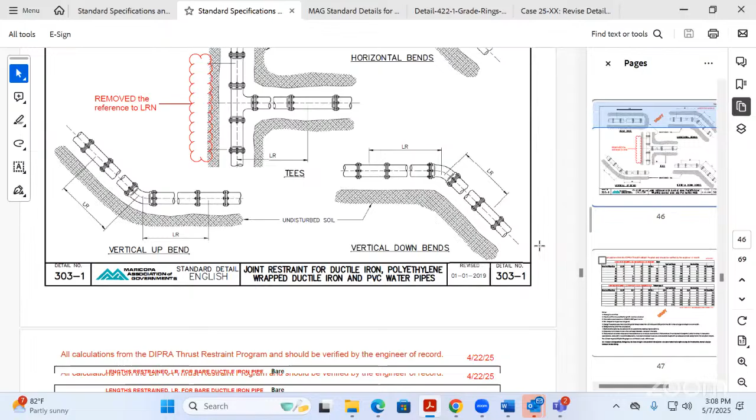So one last comment from me on that note 4. It says you have an assumption there that the soil is sand and gravel. Most agencies, I shouldn't say that, but we require bedding around the pipe, so you always got basically ABC.

But I could see some confusion. The contractor says, well, if I'm going through a clay lens or something, does that change, or does it matter? Because if I put bedding around the entire pipe zone, what governs, the bedding or the native soil you're going through?

Well, the soil designation for good sand and gravel, is that outside of the envelope of the pipe? That's what we should define in note 4. Outside the trench wall, or is that the ABC bedding type material that we're using? Now I'm glad you brought that up because I don't want to conflict here.

That's reference to the actual trench, the material in the trench, the envelope around the pipe. If you're putting in a new pipe, you're going to have a bedding. Some agencies don't allow native material, so then you're using ABC, which is sand and gravel anyway. So if we're referencing a type 4 trench, we're kind of redundant at that point. Is that fair to say or no?

There's different tables in the DIPRA manuals. That was going to be a comment I had, that you make sure that if you're referencing or using a specific modulus of elasticity, the reference is a type that's in the DIPRA manual that has got a little bit more definition to it. Make sure it links back to that, because it's based on the modulus of elasticity, often from a geotech engineer. Yeah, but it's in the DIPRA manual. There's the trench types, then there's the bedding, and the material types called out in the DIPRA manual, but it's also right out of AWWA as well.

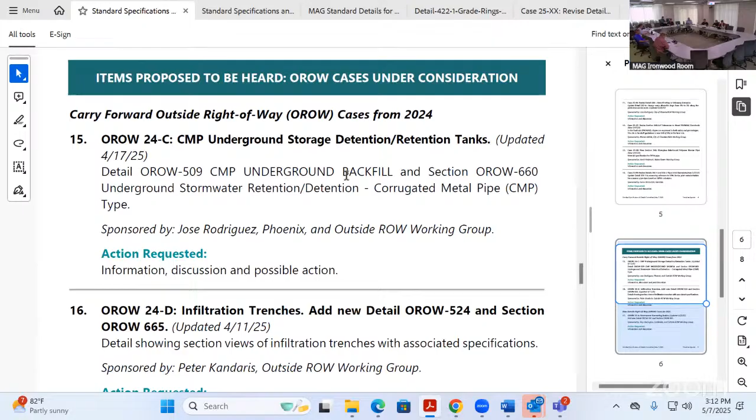Alright, let's move into agenda item number 15, which is items proposed to be heard outside right-of-way cases under consideration: 24-C CMP underground storage retention, detention and retention tanks.

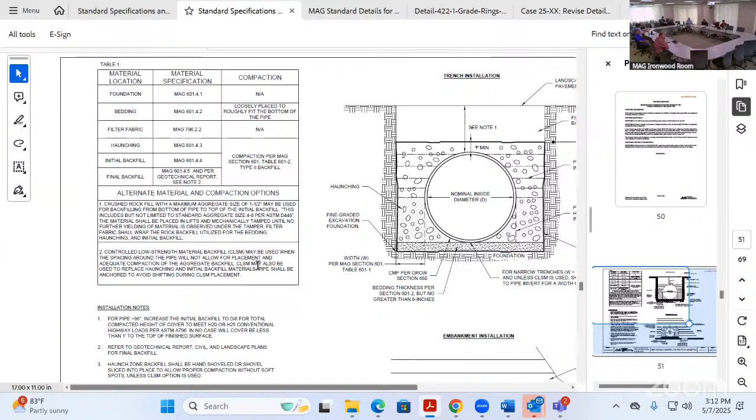This is Jose. Jose had some finishing touches he wanted to do, a few comments and some minor changes. Jose, you want to give us an update? Yes, thank you, Mr. Chairman. So last time we discussed that we were going to concentrate this detail for an application of a single barrel installation for CMP. We got a good note to make sure that we clarified that in the title of the detail, and then we added note number 5, or modified note 5, to convey that this is really the intent — for a single barrel installation — and provided conditions for what that means.

So we're really making it very hard for it to be considered a double barrel application, because it's based on certain distances related to the diameter of the pipe. You wouldn't be able to install another pipe within practically 2 diameters, or it will be considered a double barrel. But we did say that in those cases, the plans need to provide a detail or more information on how that installation should be done.

Are you guys looking at doing another detail for double barrel, or just leaving it up to the plans? So yes, because our contact mentioned — and I'm familiar with this too — most of the installations he's familiar with are more than 1 barrel. He was worried about this detail limiting that application. So that's why we put in that note that the plans can always provide more guidance on it. But it really comes down to making sure you're maintaining a balanced backfill approach when you have multiple barrels, and how to convey that information either through a detail or specifications — that's the part we still need to look into.

So I think we're going to put the onus on industry, on the vendors, to try to — once we get this one through — follow the pattern: here's what it looks like, here you go, go create a double barrel one. Show us a quadruple barrel, for multiple or double parallel pipes.

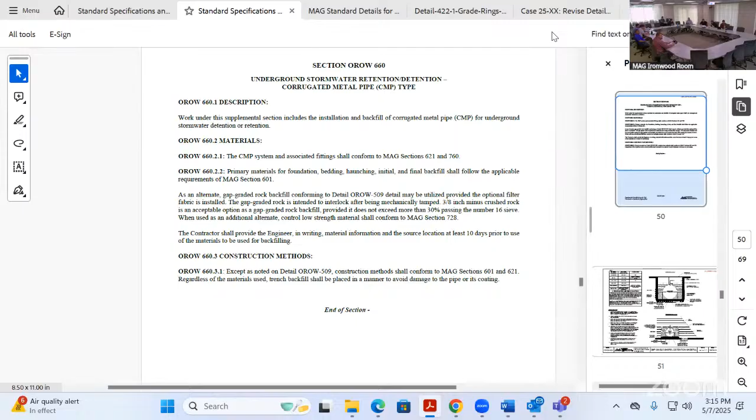Mr. Chair, I can't read the dimension at the top of the pipe in the initial backfill section. Is that just 1 foot? Is it just conflicting with some of the hatch patterns? Yeah, I think that needs to be moved over. Can that be moved over? Yep.

Your eyes aren't that bad, Ryan. They're pretty sharp. That's good, and I'm good with the glass.

Yeah, that's for both the upper and the lower. Yes, I saw that detail. It should say 1 foot minimum, except there's another little mark that got in the way of it. I blew it up big so I could see it, and I still can't see it that way.

Any other feedback, comments, questions from committee members?

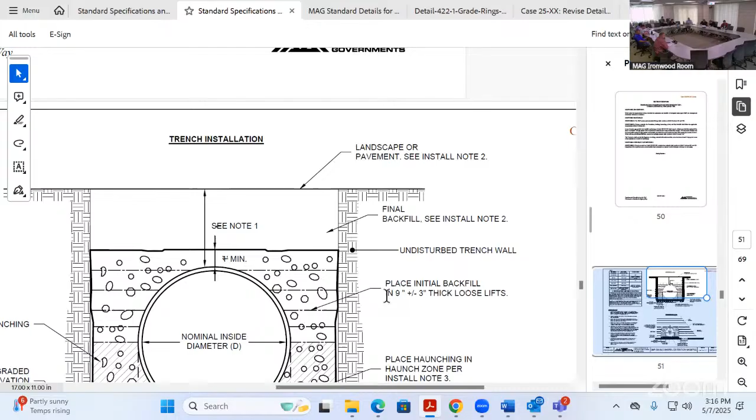All right, this case is up for action, so I'll entertain a motion from anyone at this point. Since it's my case, I'll not make a motion, but if anybody else... You don't feel it's ready to go? Oh no, I feel it's ready to go.

Well, this is your case and you can motion on your own case. I will motion to approve, to ask for a vote, with the cleanup minor note, with modification of that note.

So I do have one motion for this case to go to vote. Can I get a second motion on this case? I'll go ahead and second his motion. Thank you, Ryan.

All right, we have two motions. We'll go ahead and go into a vote. Thank you, Chair.

How about we start with the case sponsor, Phoenix? Yes. Scottsdale? Yes. Surprise? Tempe? Tolleson? Youngtown? Yes. ADOT? Yes. Avondale? Jim, you still there? Buckeye? Yes. Chandler? Yes. El Mirage? Florence? Gilbert? Yes. Glendale? Yes. Goodyear? Maricopa County? Yes. Mesa? Yes. Peoria's not here. Is there anybody I missed? Avondale says yes. Thank you, Jim. Anyone else? All right, it looks like the motion passes unanimously. Thank you, guys. Thank you, Jose, for bringing that case and putting the work into it.

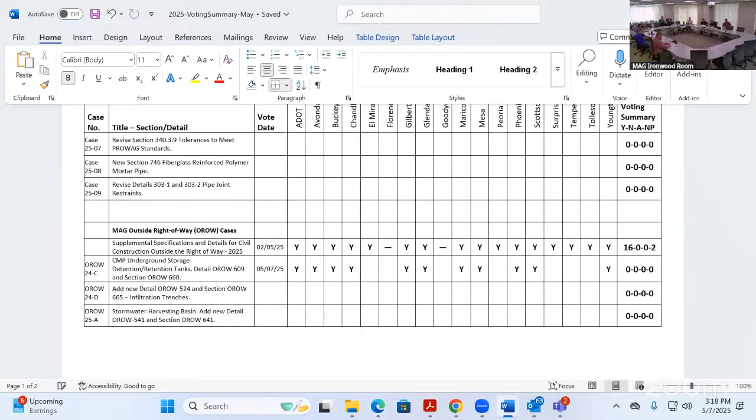All right, we'll move into agenda item number 16, outside of right of way again. This is 24-D, infiltration trenches, add new detail, OROW 524 and section 665 for the outside of right of way. This one's sponsored by Peter. Peter, would you like to give an update on this case?

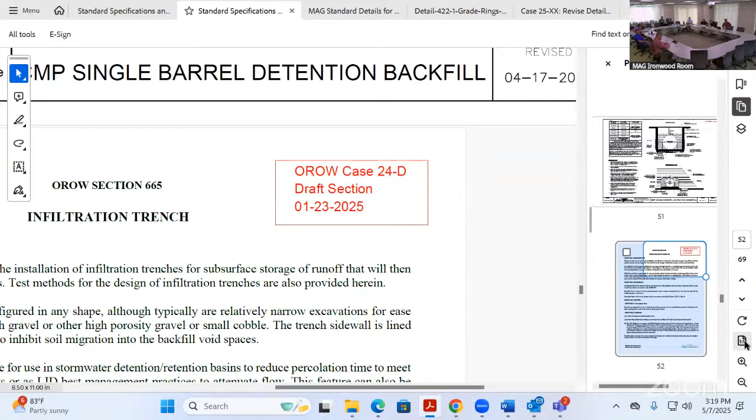Yes, thank you, Mr. Chairman. In our last meeting in April, we received several comments on changes to the detail. They have not been made for this meeting today. I'll have them ready for the next working group meeting next week, with clarifications on slopes to make sure what min and max really meant on the side. There was also a request to make sure it was identified that the infiltration material is not compacted, so that note needs to be added.

There's also discussion on incorporating in detail C, the option C, an inspection port. I'm not sure we really decided if it needed an inspection port or not. Wasn't the inspection port to see if there was standing water in there? Yeah, the question was, was it really going to be that necessary? If it's flowing, you'll see it.

It's very reminiscent of the leach field on my septic, right? Yeah, you would do the same thing. That was meant really, and so what I wanted to do was go pull something out, put it in there, but I'll have that detail so we don't have to spend a lot of time today on it. I'll have that ready next week for the meeting on the 15th with the revisions made and those options shown.

We'll talk about it in the committee. I haven't received any other comments, but it was a very spirited discussion. It was really great to get that feedback. I think once we get that, I'll be able to present this in June with all the cleanup on it. Great, thank you, Peter. Any comments from the committee members on this case?

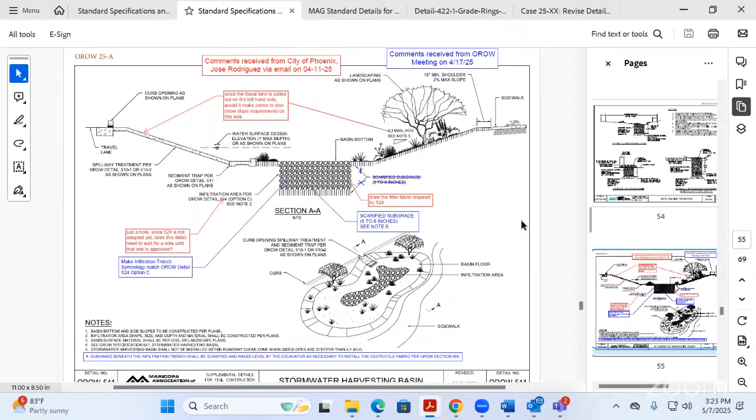He also commented on showing the filter fabric required in the actual infiltration detail, which was the previous case we just discussed, so I added that as well. That went along with the outside right-of-way group comments to change how it's shown in the current detail to match the updated outside right-of-way detail 524—essentially a symbology change, which I've made.

Then we discussed the compaction requirements—Peter had alluded to that a few minutes ago—and we added a note to the detail, note number 6: subgrade beneath the infiltration trench shall be scarified and raked level by the excavator as necessary to install the geotextile fabric per outside right-of-way section 665. We're calling out that note at the bottom of the trench.

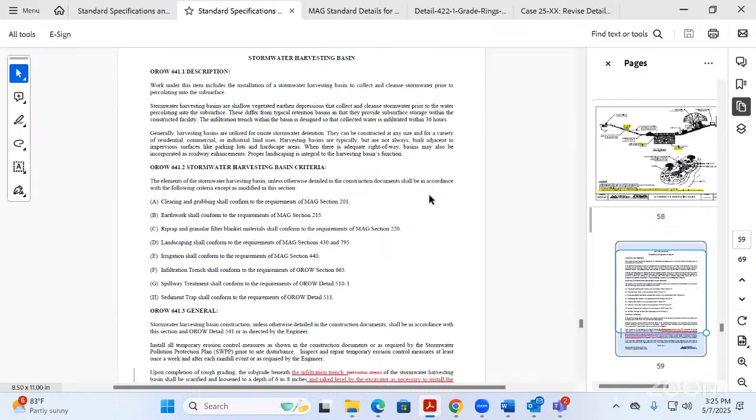That sparked a bit of an update to the specs, because instead of talking about over-compaction, we shifted to saying not to compact the base, since we don't want the base compacted. That's a lot of what you see in red, calling out the infiltration trench raking level and removing the compaction requirements that were there previously. Even though we only called out 85 to 90 percent compaction, we wanted to remove that entirely—we don't want any compaction called out for the area underneath the infiltration trench. The last sentence specifies why compaction can affect the overall permeability of the subgrade. So those were the main changes.

In addition, Jose had one other comment I thought was really good and worth the committee considering: since this 541 detail references the infiltration trench detail, Jose cautioned that we make sure not to adopt this detail before we adopt the infiltration detail, which was the case just discussed previously. That is correct—we're cognizant of that on my end.

So those were the major things discussed, and the only comments I've received since our last meeting. So, raked level—what does raked level mean in section 641, in the red, for 641.3 general?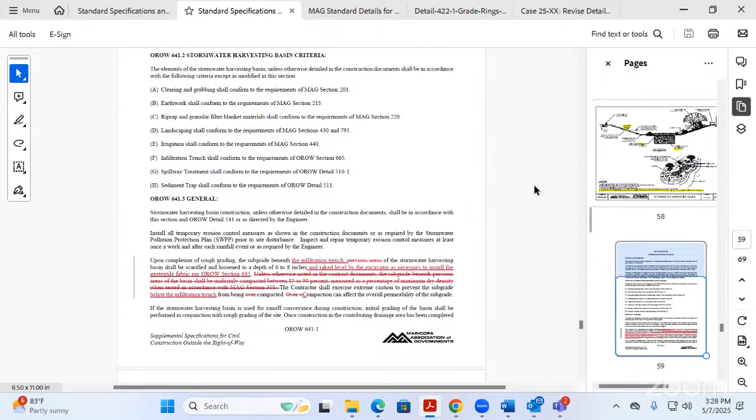Obviously you're going to have some compaction with just the weight of the equipment. I don't think you can delicately rake it without any kind of potential compaction just with the weight of the teeth. But we're not wanting to call out any type of specified compaction, because we're wanting the area to be as uncompacted as possible.

So is the concern that if you scarify it with, say, the excavator bucket teeth, and you don't rake it, and you lay in your filter fabric and then drop your rock in there, is the fear that you might damage your filter fabric? Or I guess what I'm getting at is, does it need to be quote unquote raked level? If we're not trying to put any extra compaction effort into it, can we just leave it scarified and lay the filter fabric?

If you have sufficient overlap of the fabric, then there shouldn't be a problem. But I want to go look at some other language to see if there's something. I'm envisioning they're scarifying with the teeth, reaching out, raking it, and then usually the operator turns the bucket and just smooths it out a little bit. Yeah, and I'm trying to figure out if there's some way we can specify that. Yeah, let's look at that.

Does City of Phoenix have a representative in the outside right-of-way working group? Oh yeah, myself and Keith Kesty. Oh, so that feedback I keep hearing from Phoenix is coming through the working group. Yes, okay, going in, funneled into the working group because you're present. Yeah, we've got, perfect, 2 folks from the city of Phoenix that sit on it. Oh, actually 3, 3, yes. 3, yeah, I started feeling bad. I didn't have any feedback, but I have a representative in that working group. So, all right.

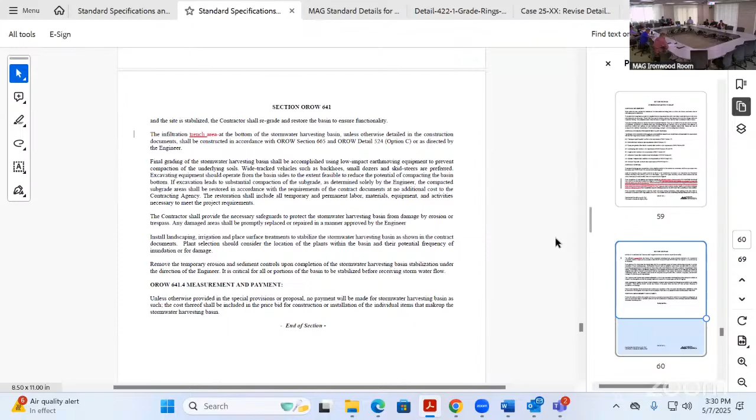Yeah, thanks Mr. Chairman. So we met on April 22nd. It was hybrid, and it was just me and Adrianne from, I forget the company now, Neenah Foundry. So we didn't have very good attendance, but online there were still some people there. I know you were out too. But anyways, we again discussed a little bit on the CIPC case.

Thanks Warren for clarifying that on visiting the ADOT spec on that. So I think that's pretty ready to go, don't you think, Warren? Agreed Jim, as mentioned, and then a broader look at overhauling the case. So hopefully we can wrap it up at our working group meeting.

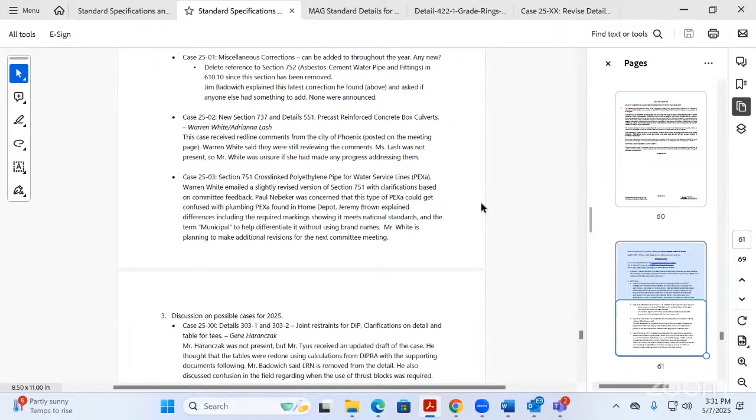Then again a little discussion on the miscellaneous corrections, and we didn't have much on the box culverts. Adrianna wasn't there, but we had a little bit of discussion, Warren, on your end. So you still think that'll be ready to go this year? Potentially, I think that if we actually have some time to get together and address all the comments and get a good draft put together, I would like to see that.

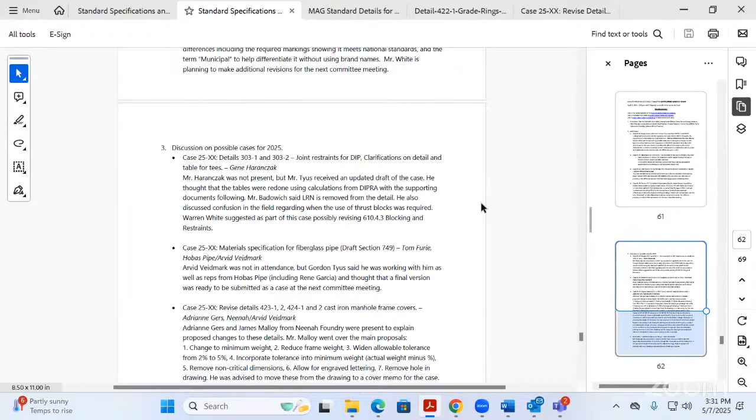That sounds good. Then we had a short discussion on case 25-3, the PEX-A pipe. Again, just to remind people that I think there's 2 or 3 agencies currently using it.

Short discussion on the Hobas, not much there. Arvid wasn't there. Adrianne was there from Neenah, and she had presented some details on their case. Arvid's presenting on the cast iron revisions to details 423, 424. Again, we had some good discussions on their case, comments on the details. They're just wanting to make some clarifications and changes to the frame, not the cover, to make it lighter and supposedly stronger. So you'll see that come forward.

And then that was about it. Well, that's quite a bit.

So, just a side note, thanks Jose, we got in touch with the City of Phoenix sewer inspection team, and it's going to help Rob out and hopefully develop these sewer video testing and mandrel specs. Mainly on the video, because City of Phoenix does their video exclusively. So hopefully we'll get some good notes and specs from them and work on that.

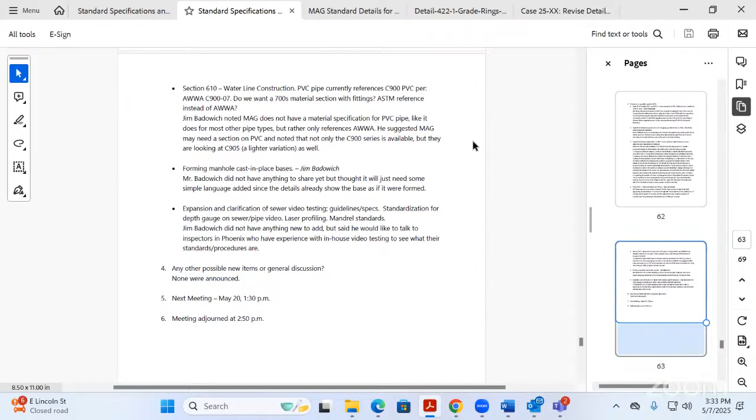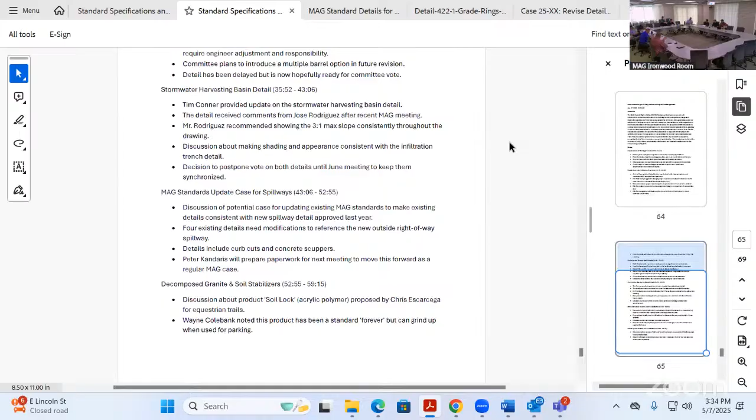Yes, thank you, Mr. Chairman. We went through the cases that we talked about already, so I won't go into that. We've gone into the detail that was discussed during the meeting on the 3 specific cases. Upcoming cases, though, we are working on, which would be...

I'm not going to call it miscellaneous corrections, but the modifications to the existing MAG details that accommodate the spillway detail that was passed last year. The formal case has been presented within the working group, waiting for comments on that. I would expect in June we probably will be bringing that one forward and showing it to this group, moving it out. So that one is moving forward.

The decomposed granite and soil stabilizers - we did have a discussion on use of the potential soil lock product, which would be used for equestrian trails, and apparently that's been used. We're going to start working on that one to try to put it into maybe a specification format as opposed to a detail format. I need to look at also some details that have been provided on those. So that one's coming up.

We may need to do a revision also to the dust palliative, MAG dust palliative spec, to allow both those materials. We'll have to take a look at that. That one's in development. We've asked the industry representative to take a look at that also.

Wayne Colebank did a great job identifying several areas that we could potentially be expanding to outside the right of way. We've got now the list to work on, and I think we're at the process now of creating a survey internally within the working group to get a feel for what's the biggest bang for the buck - where we think the best options are going to be to go after some of these specific issues. We've got now kind of a nice long dozen item laundry list.

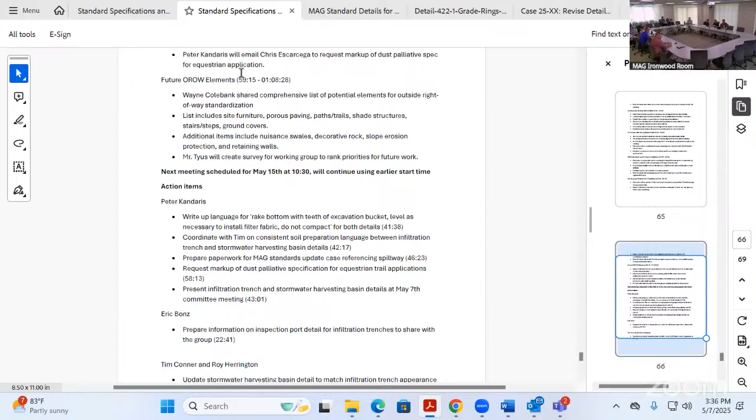But looking to bring polymer modified mixes similar to EVAC, bring that language into 326 and 719 for use throughout the cities, for all the cities. So those are pretty much what we're working on now. It's a lot - just that alone is a lot.

Yeah, so hopefully we'll have it ready for the group by June for comments to this group, but we've been working on it the last couple months and hopefully can get some more comments back next Thursday to get it out. So your next meeting is going to be the 15th as well, Thursday the 15th. Yes.

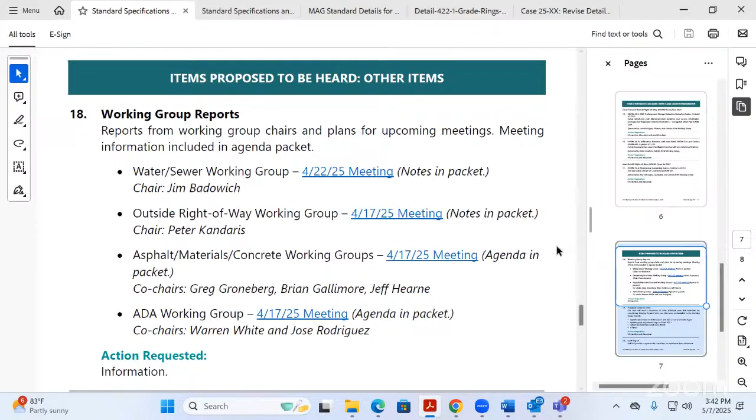Now like I said, I suspected it was 1 inch. I ran it through my city engineer and our principal engineer. Both of them agreed that if those two lines are on the same plane, that should technically be 1 inch up there. So I think we just need to give some clarification on that.

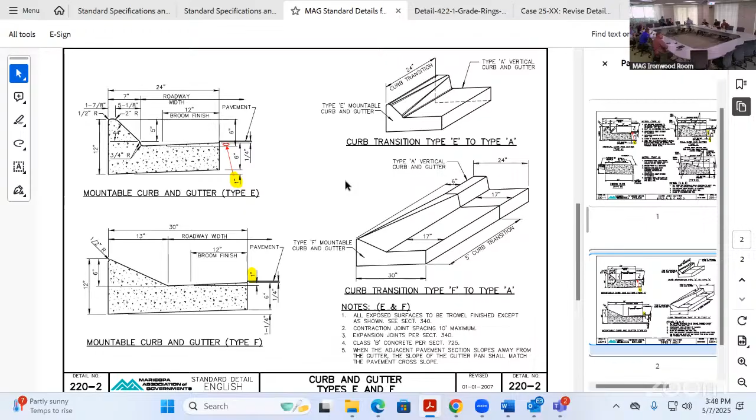That's what was mind boggling. On 220-1 it's called out, but it's missing in some of the others. Well, it's called out on type F there. So I think maybe we, see how at the bottom it's called out as 1.25 inches?

Yes, because I think it's intended to go to the back of the curb. That is the only discrepancy that I found on that detail. Why it's 1.25 inches, I have no idea, but really it's a useless measurement because it's not built like that in the field.

This is Warren. If you look at note number 5, maybe that was the original intent - the cutting of the road and matching the road, the pavement cross slope, maybe. I don't like it, I'm kind of like Ryan in that I'm not watching it to see how it's being built.

Even then, you're pouring concrete before you actually grade out the roadway, so the roadway grade isn't even set when you're pouring these out. It's roughed in and that's it.

Yep, all right, I'm gonna run it. Chairman, this is Josh Ford.

Just to clarify, when you say putting an inch there, we're talking about you have your edge of asphalt, which drops a quarter of an inch to the gutter pan, which you're then saying would then slope an additional inch to flow line. So your total vertical difference from flow line to EP would be 1.25 inches.

Yes, okay. Yeah, because you need to be a quarter inch above lip of gutter with your asphalt, plus the additional inch.

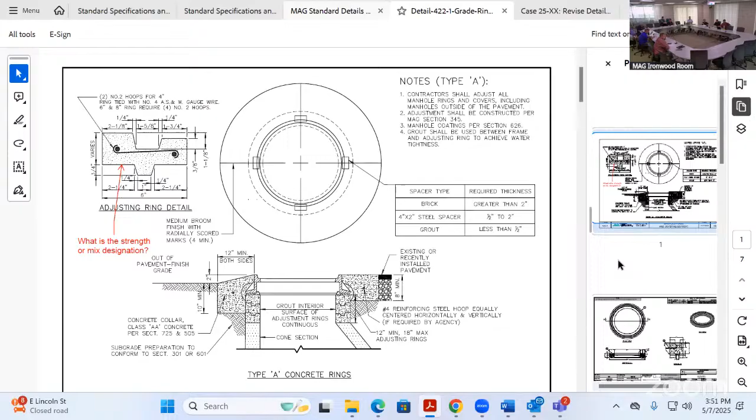I think this is posted online, Gordon, is that right? Yeah, it's posted separately on the meeting page. And then we have the one that Arvid's working with Nina on, which is the frame and cover, taking some weight out of the frame. So that's also another potential case.

Do we have any other potential cases coming this year?

All right, agenda item number 20 is the staff report. Gordon, do you have a report you want to provide? Nothing important.

All right, agenda item number 21 is general discussion. I'm going to open it up for general discussion related to specifications, construction practices, and technologies. Does anybody have anything they want to share with the committee?

Agenda item number 22 is request for future agenda items. Ryan, would you like to request a future agenda item? Okay, any requests from the members for future agenda items?

This is Josh Ford. Something that came up recently that I was looking into that might be good to get some more clarity on from MAG is fiber addition in concrete. So if you have bus bays or concrete turn lanes, etc., and you wish to use fiber reinforcement in terms of fiber strands, I'd be curious what others are using and whether there should be any additional clarity from MAG.